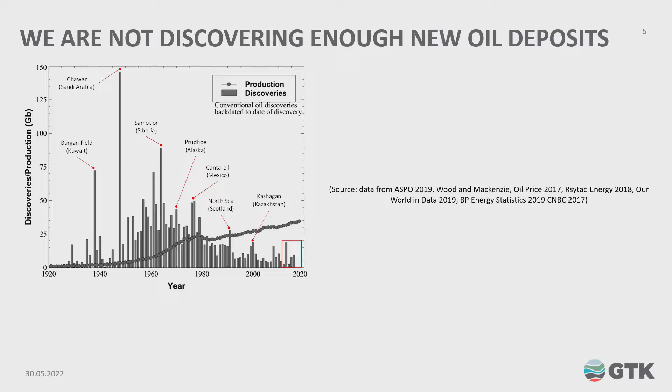So let's look at oil. I saw this chart for the first time as an undergraduate geologist in 1992. I did not understand what it meant at the time. So here is all the oil discoveries going back to 1920. You may notice that most of the oil has been discovered in the 1960s. Inside this little red square in the bottom right-hand corner is a study released by Rystad.

So there's a record low of discoveries in 2020. The largest oil deposit of all was discovered in Saudi Arabia, and it was the Ghawar deposit. Remember that because we'll come back to it. 81% of existing producing fields are in decline, and they're declining at an average of 5 to 7% per annum. Of the largest 10 producing fields, the youngest was discovered in 1976.

Here is that same data, but now produced in a cumulative percent form. The purple is discovery, sorry, and the green is production. Half of all oil has been produced since 1994. There's been a net decrease from stocks and reserves since 1981. That point there is that point. 1981 is actually on a chart on the right. Our energy use has increased steadily. We are not slowing down.

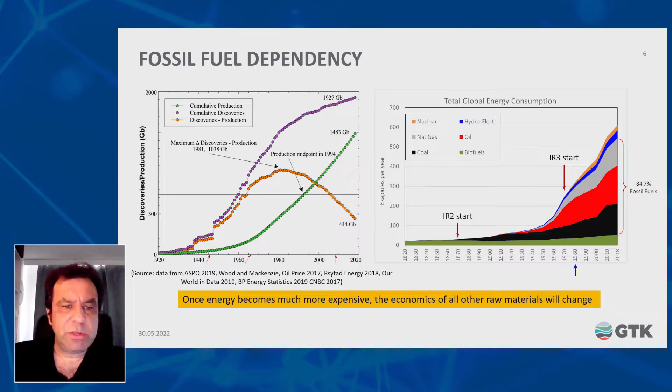We will need an extra 117 million barrels a day to achieve this. Or if Saudi Arabia's Ghawar field produced 3.8 million barrels a day, we would need to discover and then develop 31 new Ghawar deposits. So this means that the technological inequality that we see in the world at the moment cannot be resolved. We cannot resolve this with the oil industry.

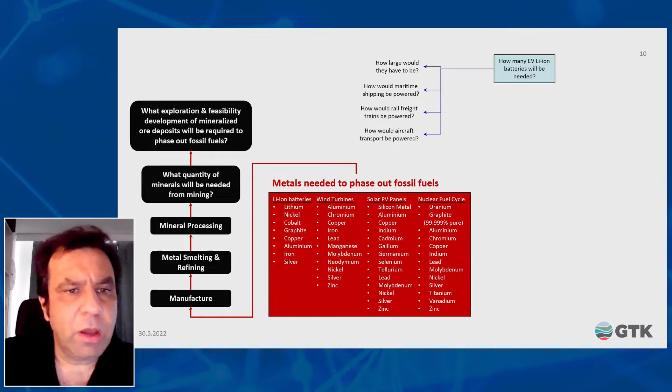If everything was a hydrogen fuel cell, what would that look like? And so on and so forth. And that gave us the amount of metals, but it also gave us the amount of power that will have to come off the grid. And so that told us the number of solar panels and wind turbines. And along the way, we'd have to work out what industry needed according to the 2018 system.

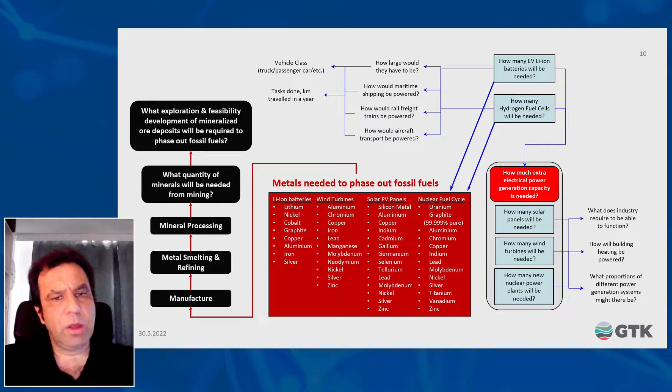So what I did was, instead of actually trying to predict what will happen in 5 years' time or 10 years' time, I decided to do the following. We will see a ramp up of non-fossil fuel systems to come in and replace the existing systems. We're going to install wind turbines and solar panels as fast as humanly possible. But there'll come a point when the existing system is replaced. When you travel through your city of Tallinn, the cars you see driving around you will all be non-fossil fuel at that point. So it'll be some point in our future.

After that, then we'll sort of settle into a more stable growth pattern. So I want to look at that point there. How do we replace the existing system, like full replacement? All the cars, all the trucks, all the aircraft, all the maritime shipping, how much power will they need? Where will we get that power from? So what do fossil fuels do for us now? How much electrical power is required to phase out those systems? How many cars and trucks? And so on. And at the bottom of all of this is what quantity of minerals will be needed to do this.

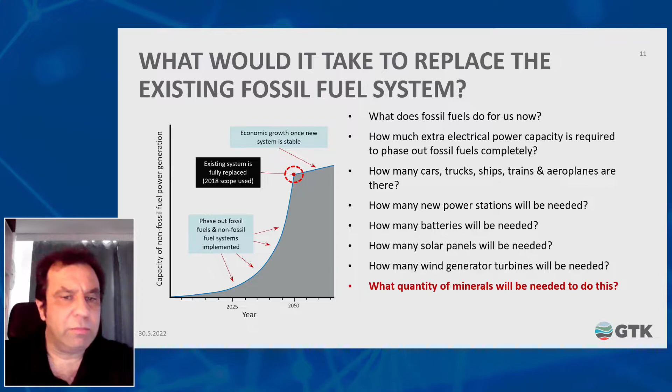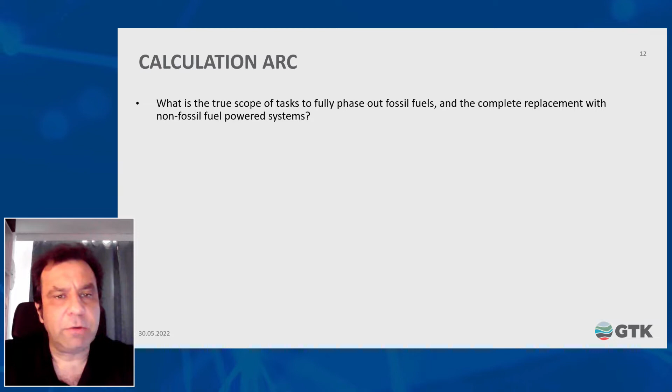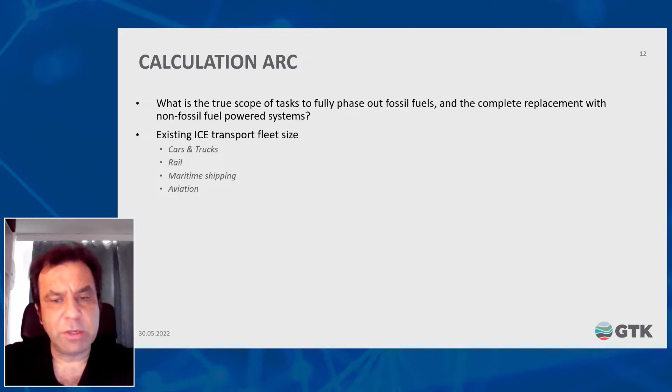The calculation arc went something as follows. We assessed the true scope of tasks to phase out fossil fuels as a complete replacement with non-fossil fuel power systems. So I looked at the existing transport fleet size, cars and trucks, rail, maritime shipping and aviation. I did this for the United States, Europe, China, and the fourth calculation was the globe as a global system. And what I'm showing you today is the global calculation.

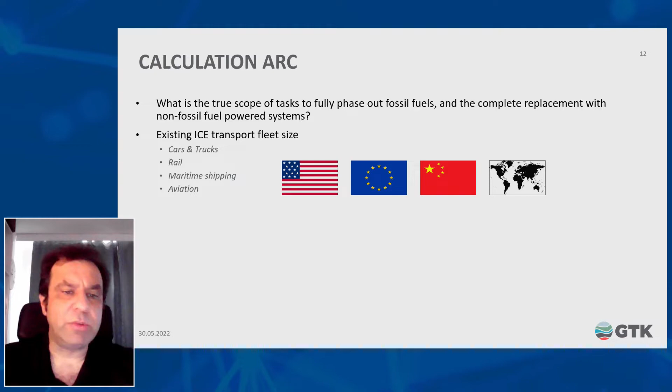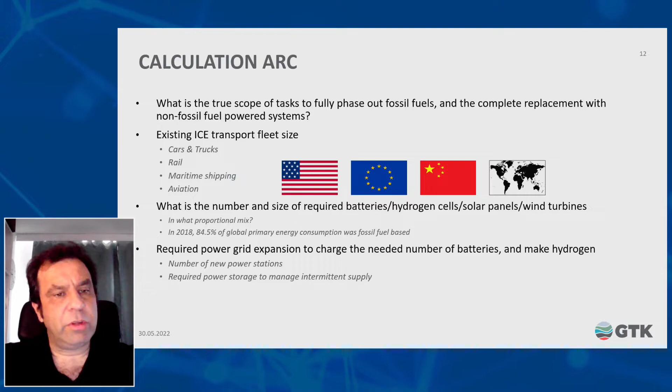So that gave us the number of technological units we will need and an estimate of the proportional mix. And to put this in context, in 2018, 84.5% of the global primary energy consumption was fossil fuel based. So most of the system has yet to actually be constructed. So also there was the number of power stations, but also the amount of buffer power storage to manage intermittent supply from wind and solar was looked at. If you couldn't be bothered reading the report, which is rather large, sorry about that, read this black box. Current plans are not large enough in scope. The task before us is much larger than current paradigm and planning allows for.

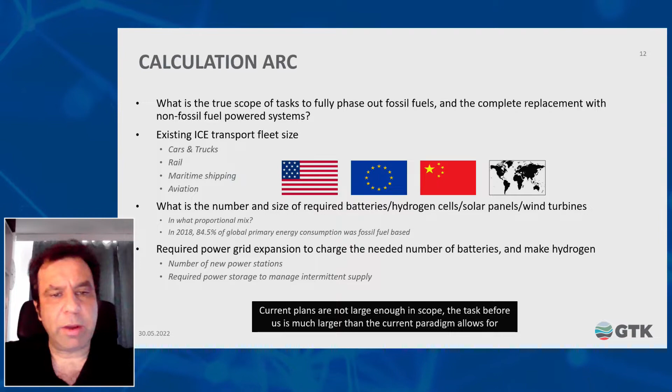The base calculation went something like this. The global fleet of vehicles was something like 1.4 billion. Now, that is a conservative estimate. The real number could be 1.5. Those vehicles traveled an estimated 15.87 trillion kilometers. To put this in context, less than 1% of vehicles in 2020 were electric vehicles. So the vast majority of these vehicles will have to be built from scratch. And as they've been built from scratch, they cannot be recycled. So it has to come from mining.

Now, because I compared electric vehicles to hydrogen directly, I was able to do some interesting things. So an electric vehicle battery for the same parallel system was 3.2 times the mass of the hydrogen fuel cell tank that would do the same tasks. So that meant for the same energy storage, a hydrogen fuel cell could go 3.2 times further or operate 3.2 times longer. Meanwhile, to manufacture that hydrogen, we required 2.5 times the electricity compared to charging the equivalent battery. So you put those two things together, all short-range vehicles should be electric vehicle systems.

So all passenger cars, commercial vans, delivery trucks, anything that stays within a city range and within a 100-kilometre radius should be electric vehicle. So we're talking about 65.2 terawatt hours of batteries. Now, all of the studies I've seen talk in terms of gigawatt hours of batteries. This is terawatt. All long-range distant vehicles or heavy vehicles should be hydrogen fuel cells.

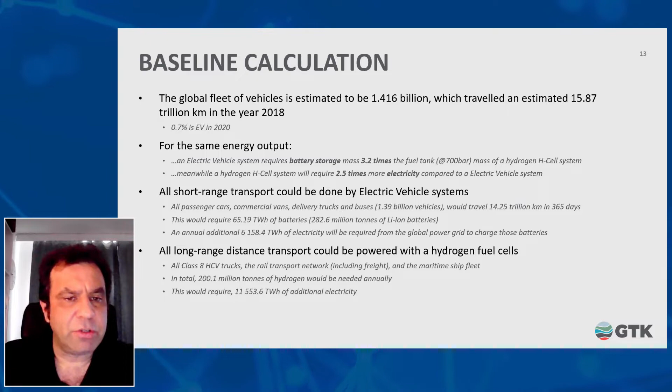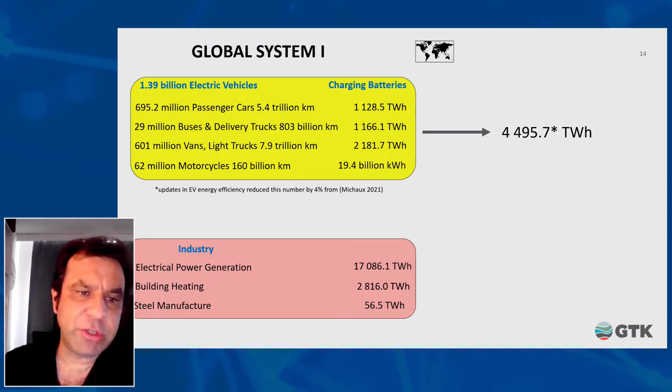So let's put the system together. So here is the electric vehicles. Those vehicles travel that distance, and we will need that amount of power to charge those batteries. This is the amount of power we will require to phase out gas and coal electrical power generation, building heating, and steel manufacture using coal.

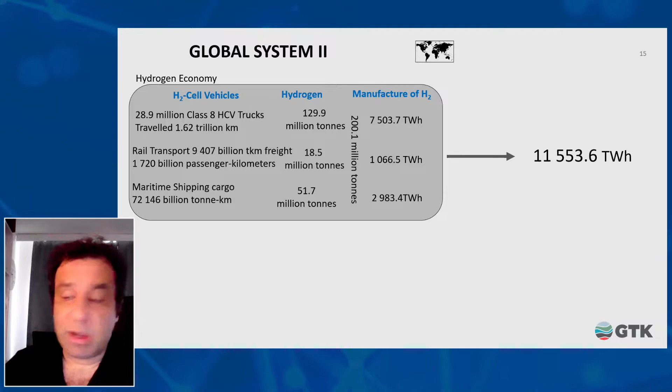And here's the hydrogen system. Those vehicles travel that distance and they will need that amount of hydrogen. And if we were to use electrolysis, like green hydrogen, we will need that amount of power because we're not allowed to use gas to make hydrogen.

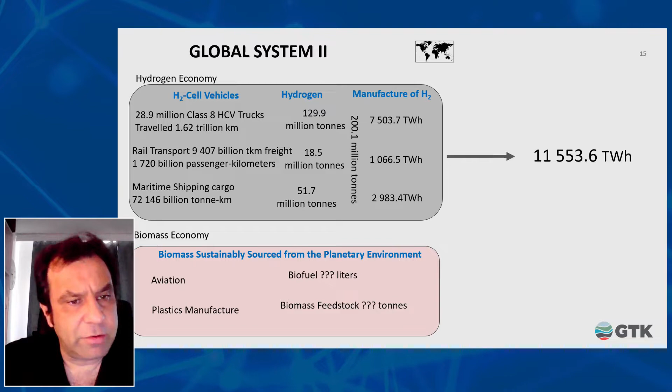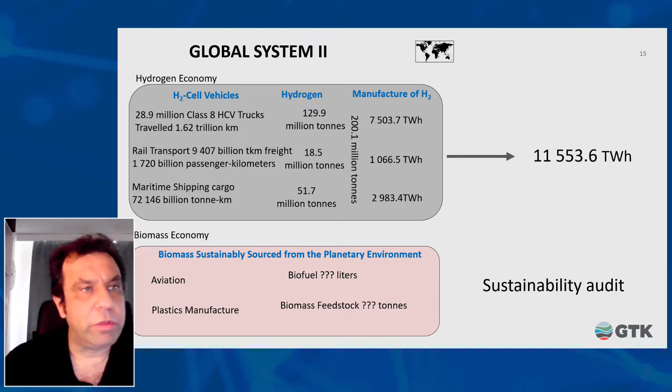I looked at biofuels, and biofuels may be the sensible way to keep the aviation industry going. It also could be the only way to keep the plastics industry going, and it also may be the best source for our fertilizers. But it is not clear how much we can actually extract out of the environment and be sustainable. So it's recommended a full sustainable audit is required with these metrics in mind.

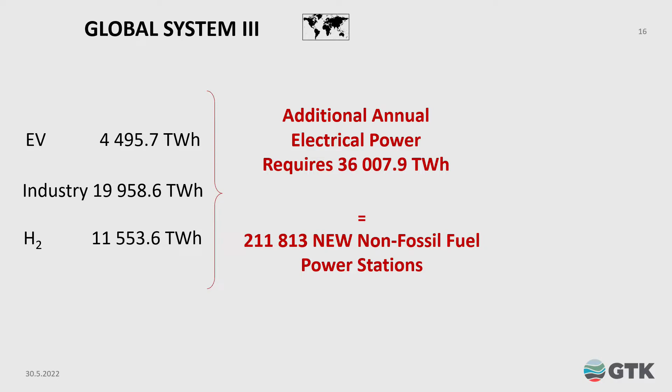So let's put the power systems together. This is the power we need. We will need an additional 36,007.9 terawatt hours a year. Now, to do that, we're talking about over 200,000 new non-fossil fuel power stations. To put this in context, the power plant fleet in 2018 was 46,000 stations.

This shows the difference in energy return and energy invested for the individual non-fossil fuel systems compared to fossil fuel systems. So if we put that all together in the energy split that actually happened in 2018 and expanded it accordingly, this is how many power stations we will need.

Now, the elephant in the room is the stationary storage. Wind and solar are highly intermittent. We need a buffer. Now, supply and demand for the energy system has to match. And as demand goes up and down, supply has to go up and down. At the same time, wind and solar are highly intermittent, both on a day-to-day basis, but also on a seasonal basis. So we need a buffer.

And in the literature, that buffer is recommended. Some authors are recommending 12 weeks for the entire system as a buffer, or 1 month for the entire system. I'm recommending a 4-week buffer for just wind and solar only and nothing else. Now, if we were to do that, we need 548 terawatt hours of batteries. That is almost 10 times what we need for electric vehicles.

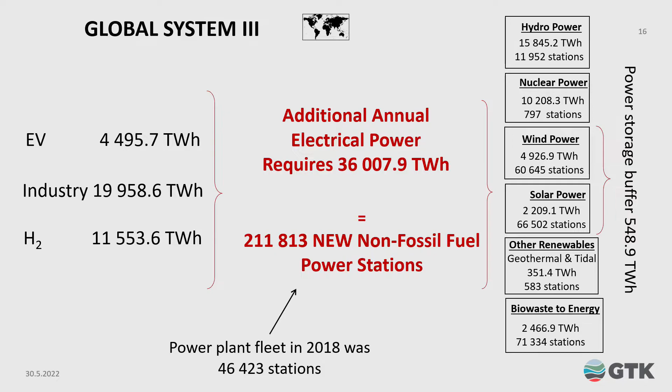Now, currently, to protect the system, we are using the gas industry as that buffer. If we take the gas industry away, we need to find another buffer. And at the moment, coal can't do it, nuclear can't do it. So without gas, we're in trouble.

So if we were to deliver 1,000 terawatt hours of power to the grid over 1 year, I ran some statistics of the performance of power station systems in 2018. Nuclear was our best performer by far. But there's wind and solar. Now, the International Energy Agency believes that the future is going to be based on wind and solar.

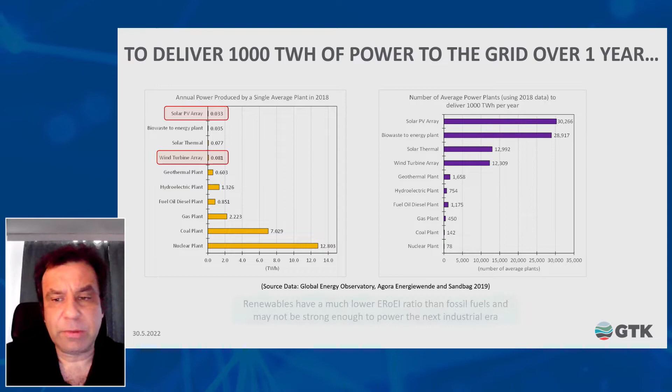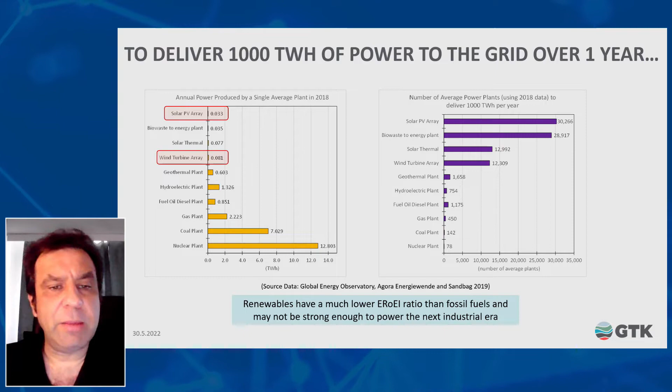But if we were to do that, let's say you want to deliver 1,000 terawatt hours of power a year. How many stations would we need? Well, you could knock out 142 coal-fired power stations, but you'd need something like 30,000 solar PV stations of average size to replace them. That's not solar panels, it's stations, solar panel arrays. So renewables have a much lower energy return on energy invested ratio than fossil fuels, and they may not be strong enough to power the next industrial era.

So here's those numbers graphically. This is the non-fossil fuel power systems that we can use at the moment. The white, oil, gas, and coal, is what we want to phase out and replace. The green on the right is what we need to bring in and replace. So the tasks are as follows.

To put this in context, in 2018, we produced globally 26,614 terawatt hours of electrical power for the year. So we are discussing making a power grid that is larger than the existing power grid with expensive and complex power that's not as flexible. That's the nature of the task in front of us.

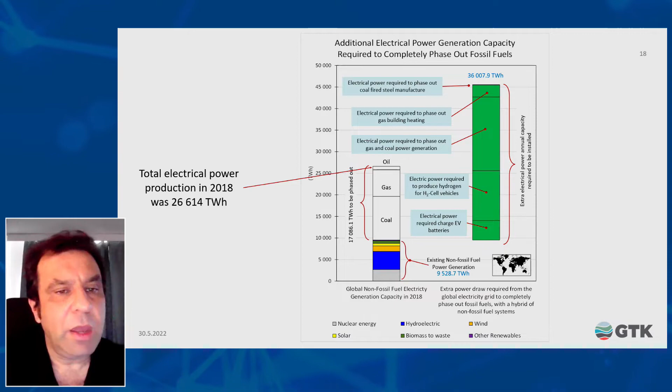So charge the batteries, make the hydrogen, phase out oil, gas, and coal electrical power generation, heating of buildings, and the little sliver on the top is the steel industry.

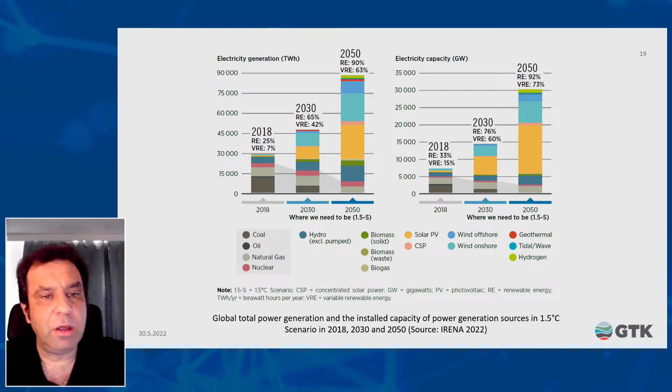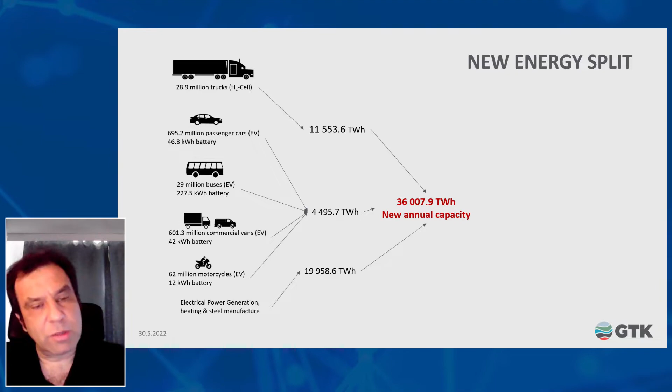So that's the next generation of work, which I will now show. The International Renewable Energy Agency has actually released an estimate of what they think the energy split of 2050 might be. And so I've taken this column on the far right-hand side, and I've imported that into my work. So this is the task. This is what we need to deliver in additional capacity. So how do we split that up to the new energy split? And so I've come up with these numbers.

So I've assumed the following: the nuclear power plant capacity will double in size, 100% addition. Hydroelectricity will increase by 120%. Geothermal will triple in size. Biowaste to energy will stay the same because we can't harvest too much more from the environment anyway. So the remaining power will come from wind and solar, 50% between each other. The wind will be split between 70% onshore and 30% offshore. The solar will be split to 90% for photovoltaic and 10% for thermal.

So I took those numbers and I worked out how much extra capacity we will require, and then that gives us the estimated number of new power stations that we will need. This is the new energy split. This was developed from a combination of the IRENA 2022 projection and some of my own assumptions from my own work put together.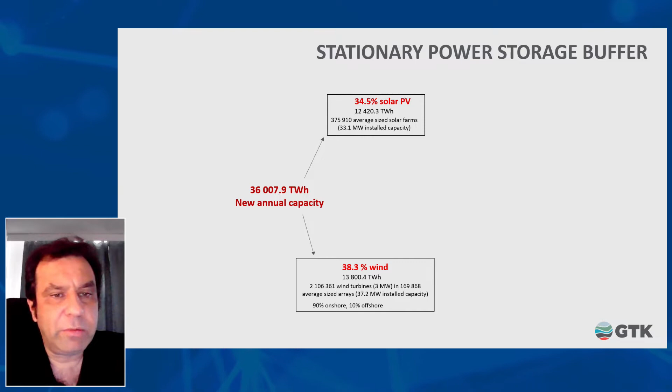So, stationary buffer storage. If we use the energy split I described before, with 34% for solar PV and 38% for wind, that will require 548 terawatt hours of buffer storage. This is the elephant in the room. I have not really seen this discussed effectively in the European Commission planning meetings at all. They're aware that they do need buffer storage, but it's not clear how much.

In Australia, there is a 100 megawatt, 129 megawatt hour lithium-ion based power station that is providing a buffer for the local wind turbine array, and it's been quite successful. So how many of those stations would we need? In the global system, we will need 15.6 million power stations like that, if we were to go down that route.

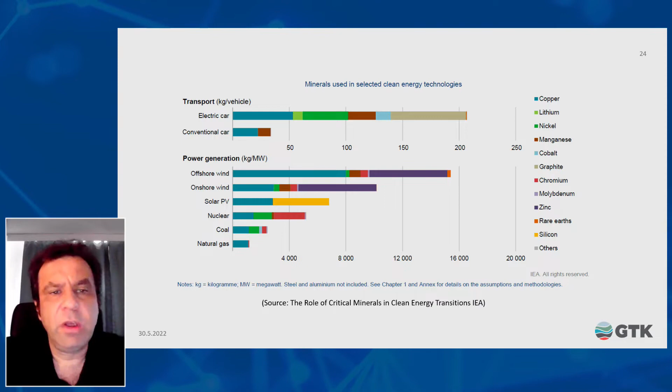Okay, so we've assembled how much power we need and how many systems we need. So now let's look at the metals. The IEA released a nice report that showed the metal content for the different systems. And so I was able to go through each and every one of these systems and estimate the metal content. They also had a projection of what the market share would be in 2040 for, say, wind. So I used the 2040 numbers.

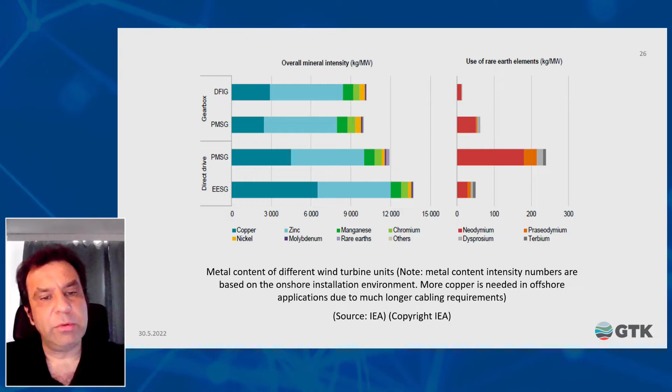We had 4 different technologies for wind turbines, and we had estimations of what they would be for onshore and offshore. And then they had the metal content for each of those wind turbine technologies. So I was able to estimate the amount of metal that we will need for the global wind turbine fleet.

So if we summed all that together, so first we've got the number of technology units. That's this slide here. How many cars, trucks, electric vehicles, hydrogen fuel cells, solar panels, wind turbines, etc. will we need? And this is everything. Electric vehicles, EV batteries, hydrogen fuel cells. This is the wish list to phase out fossil fuels to make 1 generation of units. Remember, each of these units, once they've been produced, will only last between 8 and 20 years, and then they have to be replaced. So this is not a permanent addition. This is 1 generation.

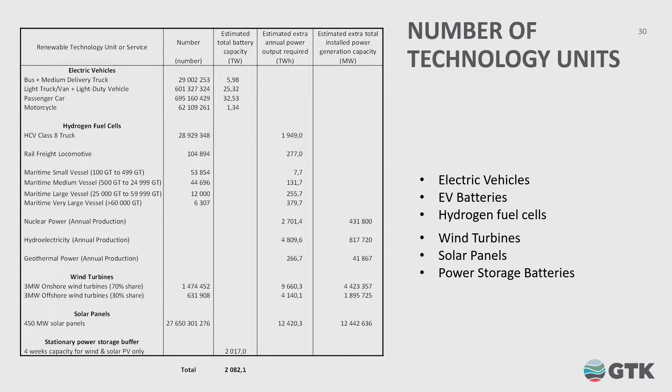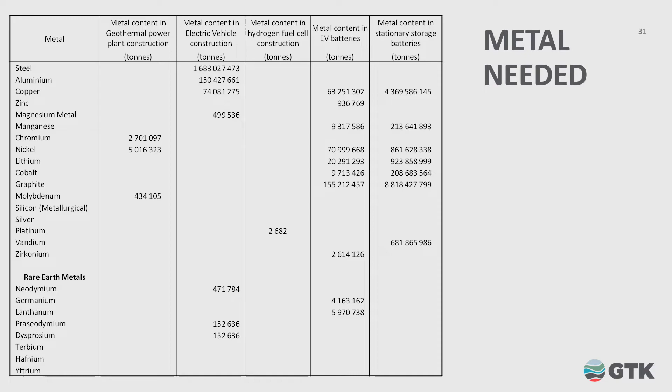So I summed together the metal needed across all the systems shown into one place. And then put these numbers. Okay, so what if we were to put those numbers against production? So I've assembled the metals that we've needed in the far left-hand side. Then you've got the total metal required to produce 1 generation of technology to phase out fossil fuels. And the numbers are huge.

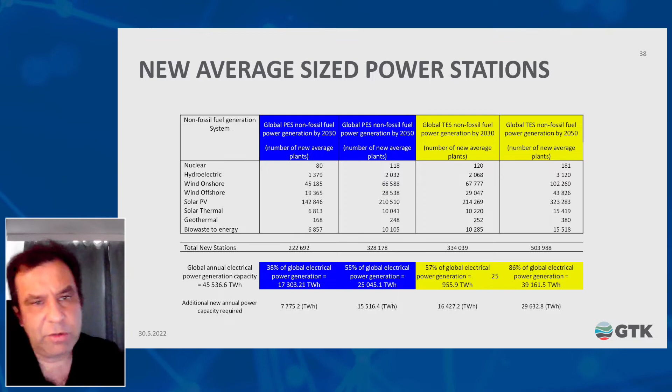In conclusion, the additional system capacity, that number is incorrect. There should be 36,007. The same non-fossil fuel energy mix translates into, again, that is actually the old numbers. The electrical power generated from wind and solar is highly intermittent. We will need a massive buffer storage. The total mass of lithium-ion batteries required to phase out fossil fuels is about 2.8 billion tonnes. Current thinking has seriously underestimated the scale of the task ahead.

Nuclear is vital to keep the industry going, but it cannot be expanded to replace fossil fuels. It is not the magic bullet. Neither is biofuels. We will need biofuels in larger capacity than we have them now, but they cannot be the magic solution. Battery chemistries other than lithium-ion should be developed according to different mineral resources. There's a projected shortage of supply of raw materials for battery manufacture. 2019 production rates are not even close to being appropriate, but neither are the 2022 stated mineral reserves.

So yes, we need to do a lot more exploration, but frankly, the task is so large that perhaps we should rethink the plan in the first place. Metals are the new oil. Metals of all kinds are about to become much more valuable, and an evolution of the industrial ecosystem is highly likely. There is a coming renaissance for the exploration and mining of minerals.